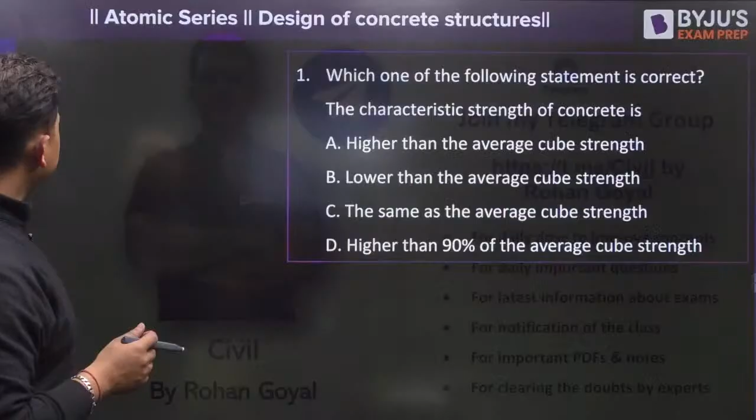Starting with the first question everyone, quickly join everyone. Let us start with today's session, and here is the first question. Which of the following statements is correct?

Vanakkam. Subramanian, vanakkam. So welcome guys.

Welcome, so here is the first question. Tell me what is the answer to this particular question. Very easy question, conceptual. Tell me what is the value of this particular answer. Answer in the comment section everyone, I want each and every one of you to answer. Which one of the following statements is correct? The characteristic strength of concrete is: A) higher than the average cube strength, B) lower than the average cube strength, C) same as the average cube strength, or D) higher than 90% of the average cube strength. Tell me what is the answer.

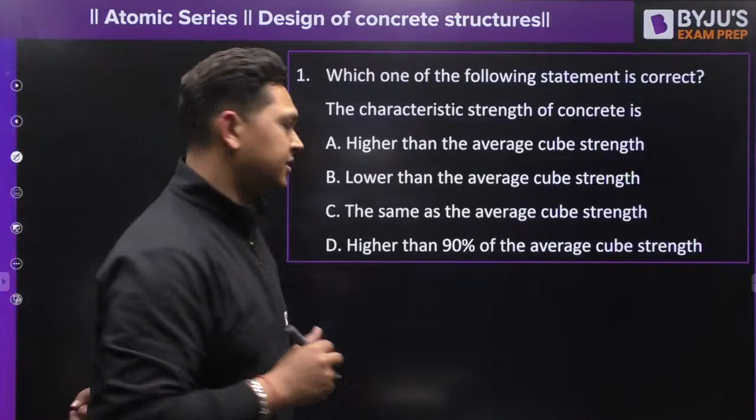Characteristic strength of concrete. Characteristic strength of concrete. Tell me what is the value.

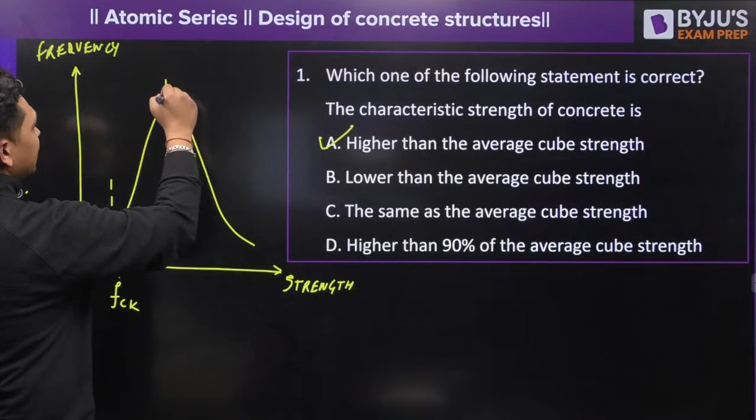Yes, B, very good, lower than the average cube strength. So the characteristic strength of concrete corresponds to a value below which not more than 5% of the test results are expected to fail. So only this area is only 5%. And the average strength is also referred to as the mean strength. So from here it is clear that FCK is less than that of the mean strength.

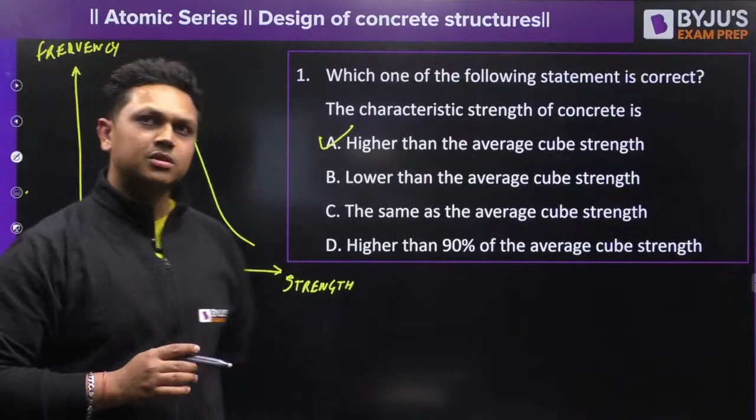So the answer to this - sorry, I have clicked the wrong option, I am sorry, I have ticked the wrong option. So it is clear that it is lower than the average cube strength. Characteristic strength of concrete is lower than the average cube strength. If there is any doubt, you can comment in the chat section at any time, I will refer to your doubt.

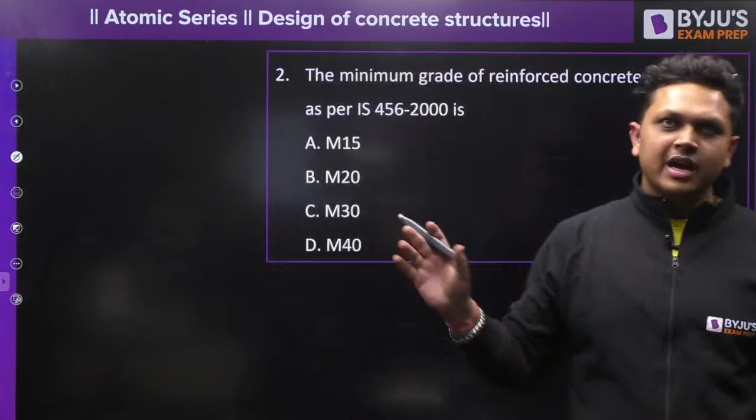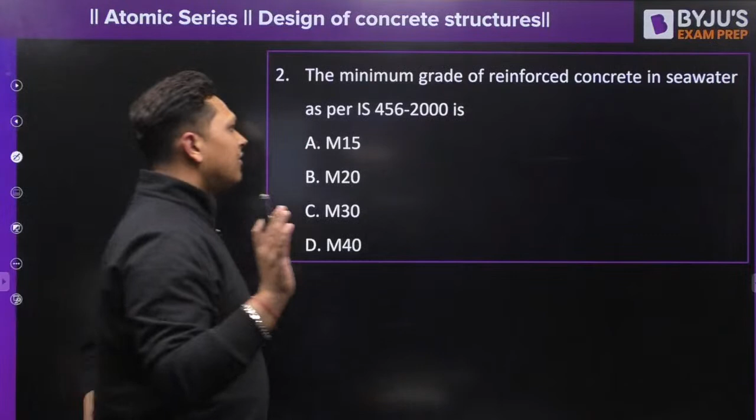Okay, moving on to the next question. The minimum grade of reinforced concrete in seawater as per IS 456-2000. Each and every one of you must be able to answer this question. Tell me what is the answer, A, B, C, D. What is the minimum grade of concrete in seawater, for construction in seawater, or you may also find it in a coastal environment.

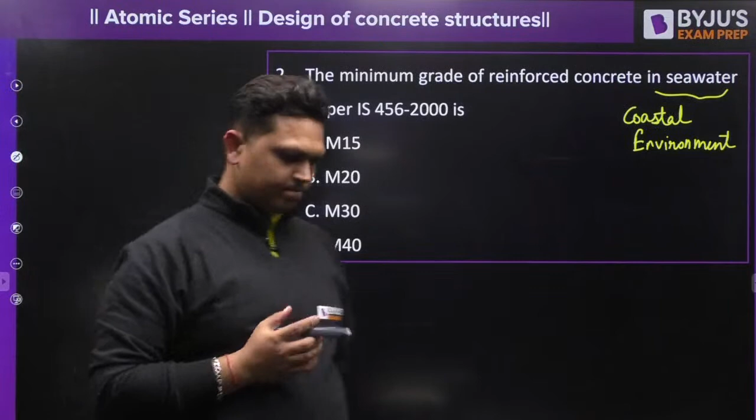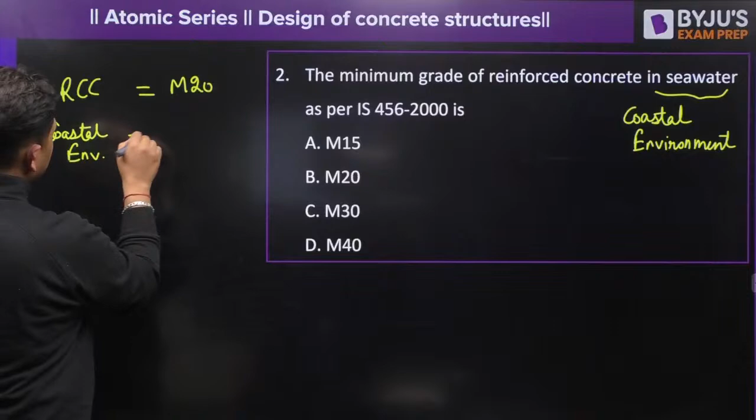In a coastal environment, you may also find it like this. Tell me the answer. For minimum grade of concrete for RCC, normal RCC, mild and severe conditions: the minimum grade of concrete is M20, and if it is in a coastal environment, it is M30.

The answer is M30, very good Suraj. I am finding that there is only one student interested in the BARC and HAL examination. What about others?

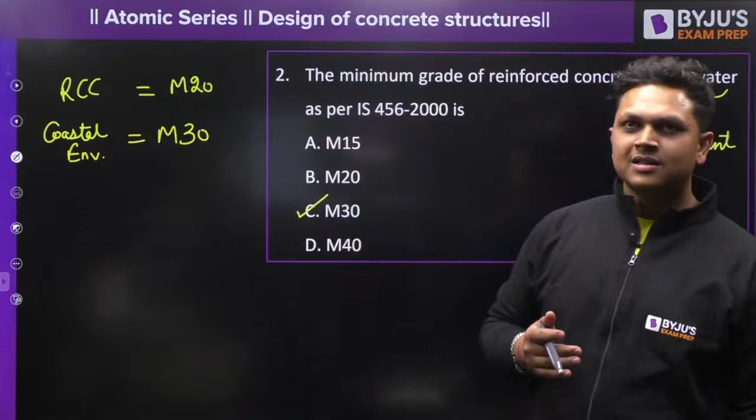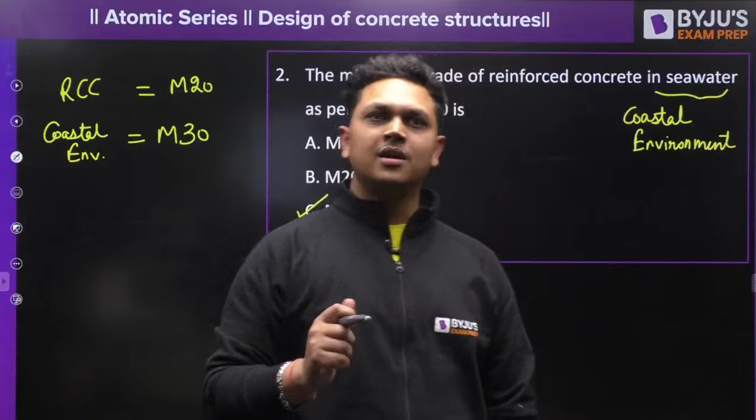Have you lost the hope? Have you guys lost the hope? Tell me, what happened? Jagadishan has also answered me, very good. What about everyone else? Have you lost the hope of clearing the BARC and HAL examination? No, right? You still have the hope. You can still do it, you just have to keep consistent, keep working hard until you reach your goal.

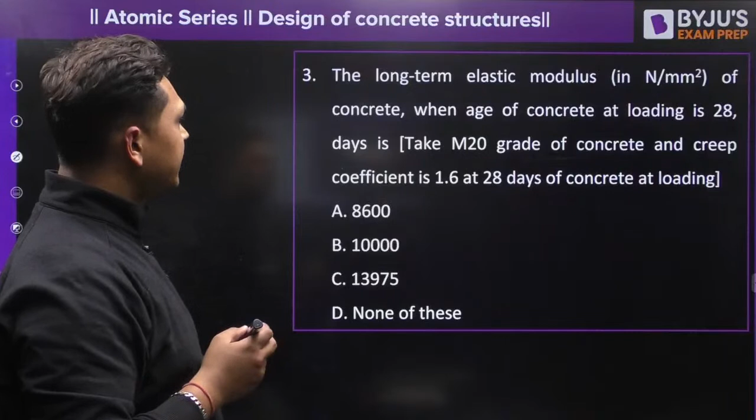Moving on: what is the long-term modulus of elasticity of concrete when the age of concrete at loading is 28 days? You are also given that the creep coefficient is 1.6.

Yes, M30 corresponds to the severe category. Very good, Sumit. Excellent. Severe category corresponds to when the concrete starts to get exposed to the coastal environment.

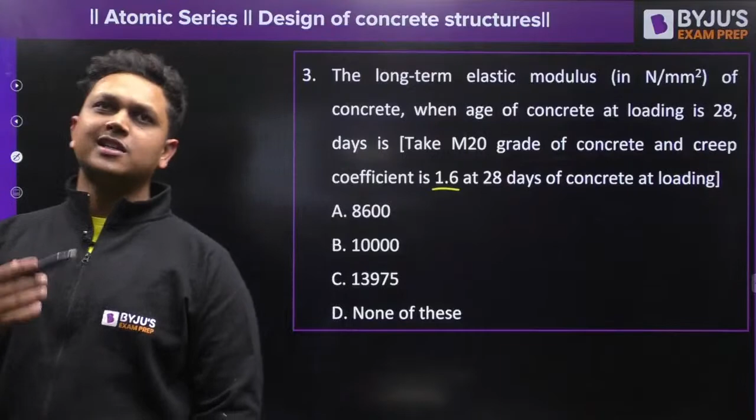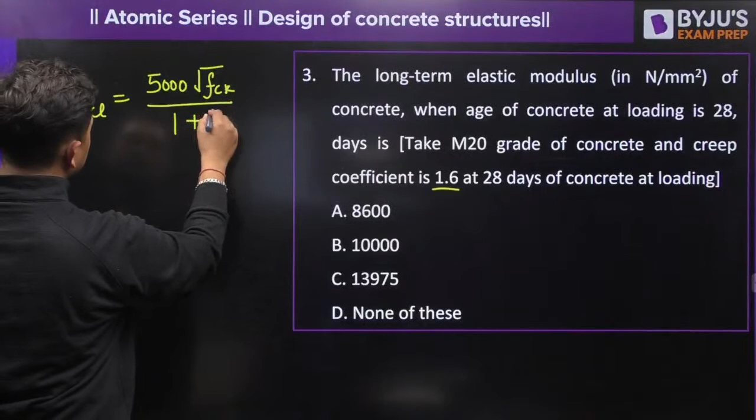What is the answer? Long-term modulus of elasticity. The creep coefficient is already given to you as 1.6. Substitute all the values.

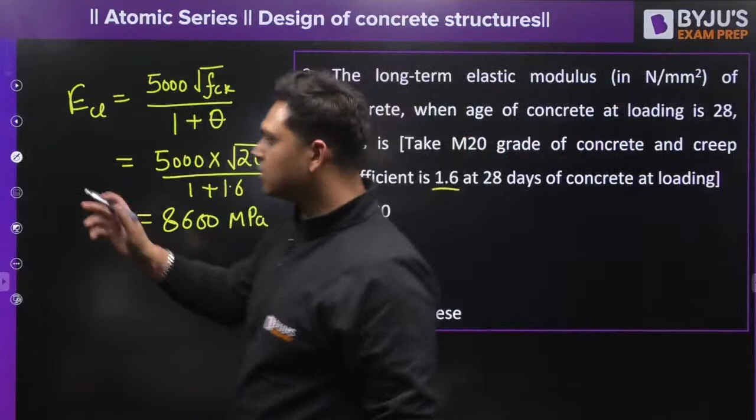If you simplify this and solve it, you will get the answer as option A, right? So the answer is 1800, 8600 megapascal. Each and every one of you getting the same answer? Very good, Sumit, very good Jagadish, Suraj.

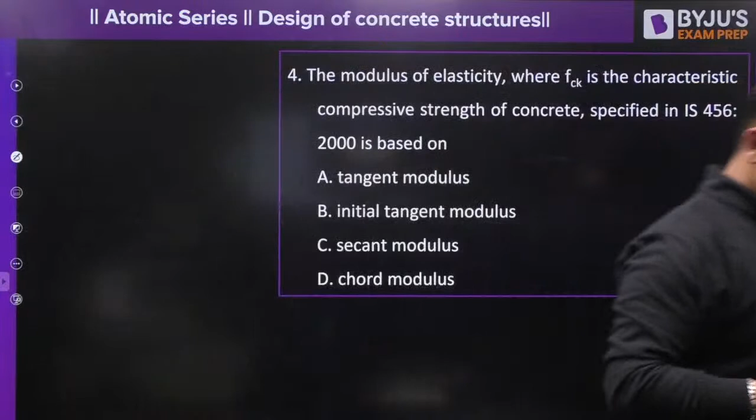Moving on to the next question. Read the question and tell me the answer. This is a tricky question, and a lot of students tend to give me the wrong answer to it. I have explained the answer again and again, and still students make the mistake.

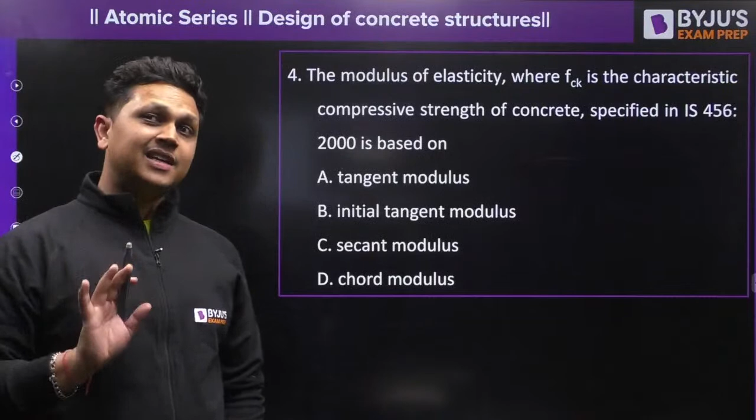Meanwhile you can give me the answer, I will draw the diagram. So this is the stress strain curve.

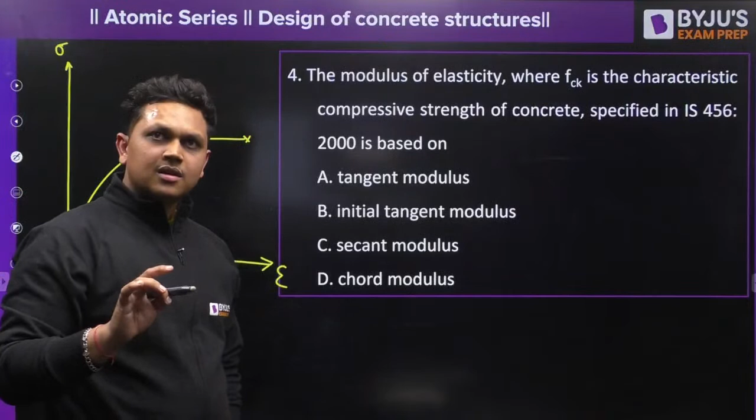What is the answer? This is not the answer, right? Tangent modulus is not the answer. Secant modulus is the answer. Very good, Sumit, very good.

So when we define the modulus of elasticity of concrete, it is defined at a stress level of sigma CBC, which is almost equal to FCK by 3. At this particular stress level, the slope is determined, and this slope is your modulus of elasticity of concrete, which equals 5000 under root FCK.

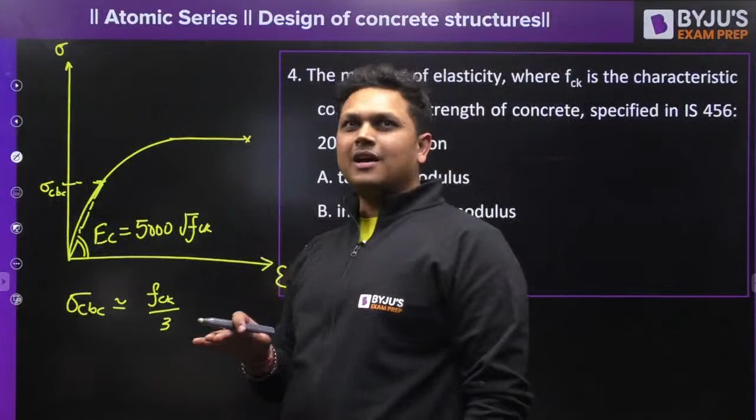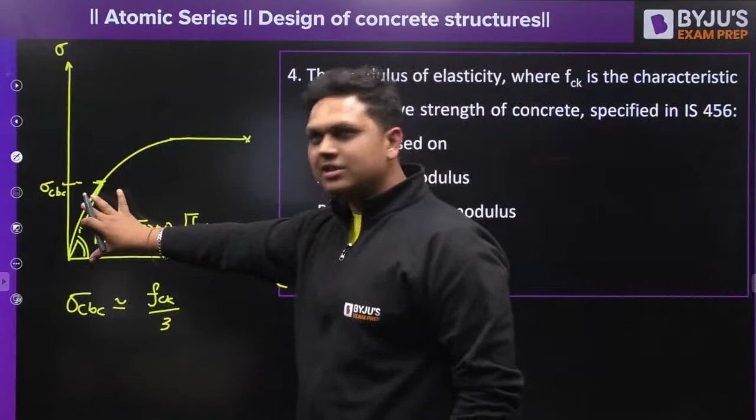So at this particular stress level, the secant modulus is calculated. Coincidentally, in the actual curve, the value is similar to the tangent modulus. There is no difference between tangent and secant modulus in value, but as per the concept of how it is obtained, it is the secant modulus. Do you understand the difference?

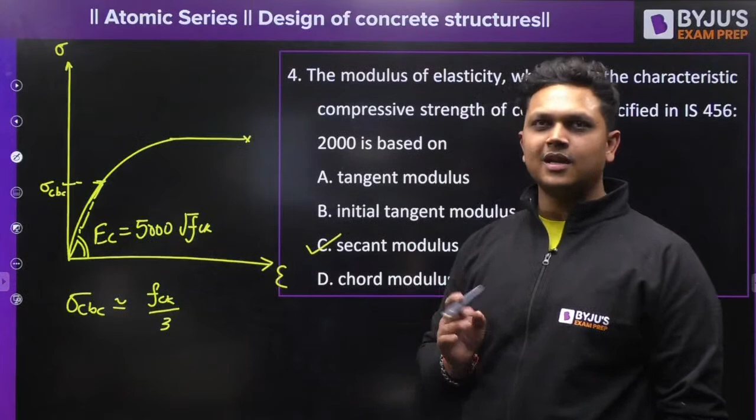Yes or no? Comment in the chat section and let me know, everyone. Do you understand the difference? A lot of students will give me the answer as tangent modulus, but no, tangent modulus is not the answer. Secant modulus is the answer.

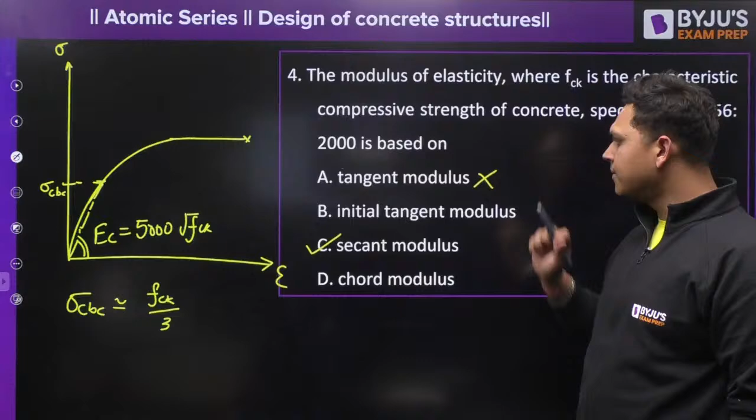All right, next question. Stress strain curve of concrete - I have already given you hints toward the answer, so quickly tell me. Now I want answers from each and every one of you. You already know the stress strain curve, now tell me the answer.

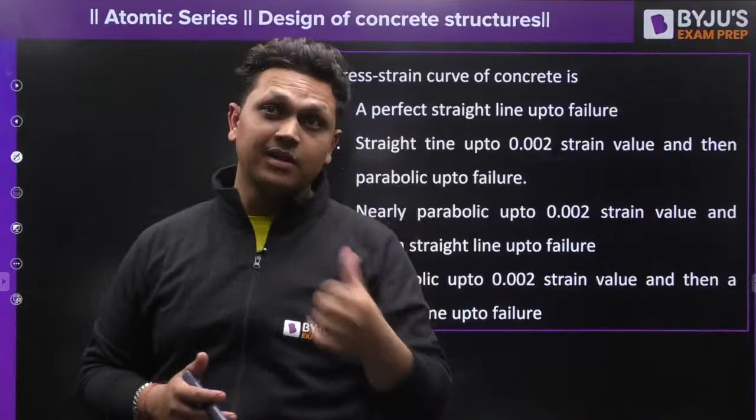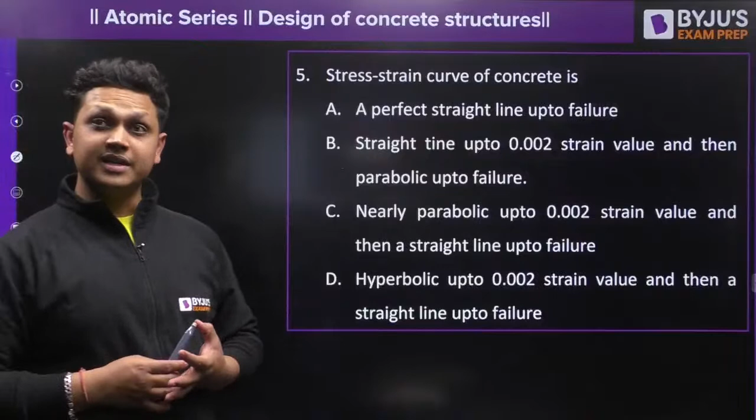So the stress strain curve of concrete is... yes, answer guys, what is the answer? No Suraj, you are wrong. What happened, guys? This is surprising that I am getting a wrong answer to this question. Yes Babu, exactly, you are right. Suraj, now you have given me the right answer. Jagdish, you are still giving me the wrong answer. Sunil and Jagadish, right? Guys, I have already drawn the stress strain curve.

So the stress strain curve of concrete is nearly parabolic.

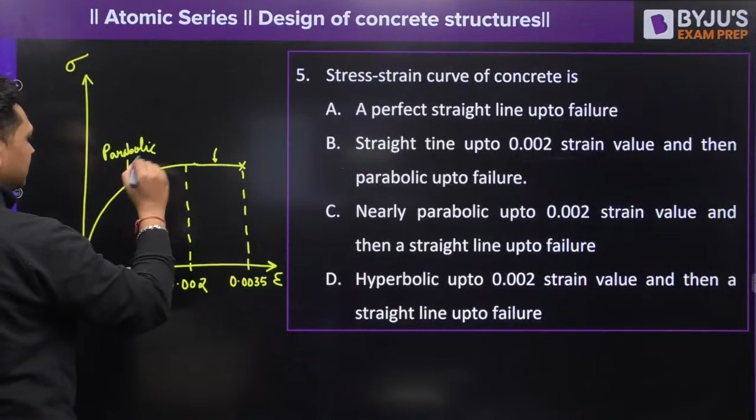Up to a strain value of 0.002 and it fails at a strain value of 0.0035. So it is parabolic up to a strain value of 0.002 and a straight line at a strain up to the failure value. So the answer is C. C is the right answer. Is it clear to all?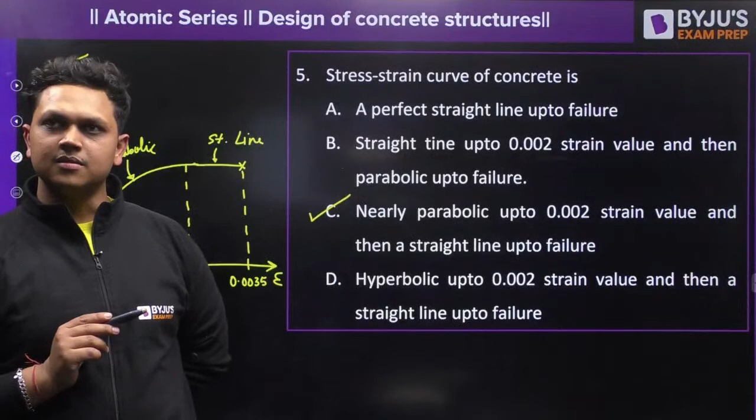Next question. The stresses in concrete in a reinforced concrete element under sustained load due to creep - what happens to the stresses due to creep? Whether they increase with time, decrease with time, remain unchanged, or fluctuate. Tell me, what happens?

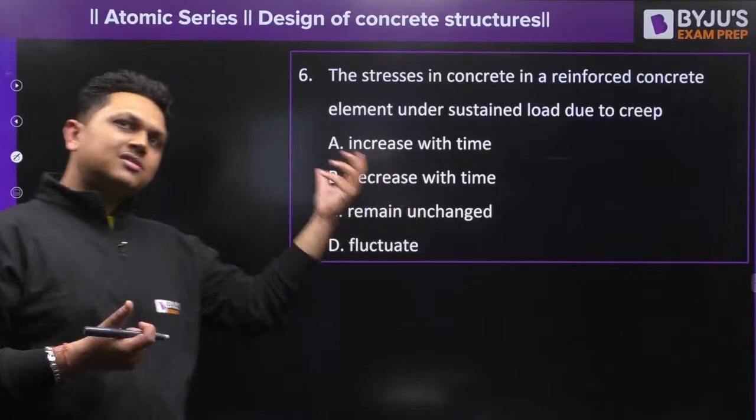So due to creep, plastic readjustment of elements takes place. The molecules of concrete will undergo plastic readjustment, due to which the stresses which were induced in the material due to the applied load will get reduced, because the stresses get converted into plastic strain, which is also referred to as creep. So the stresses reduce with time.

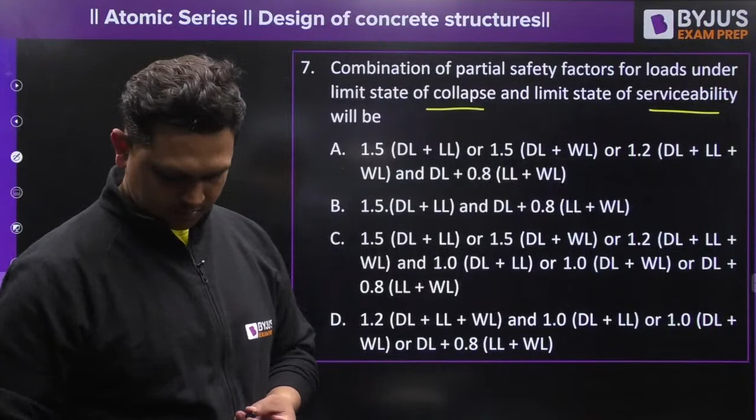Next question. Combination of partial safety factor of loads under the limit state of collapse and limit state of serviceability are given. You have to tell me which of the following is correct. Look carefully, tell me the answer. You take 2 minutes, tell me the answer.

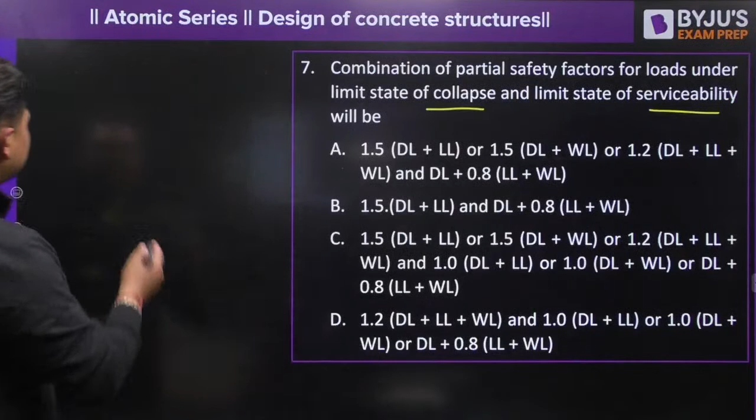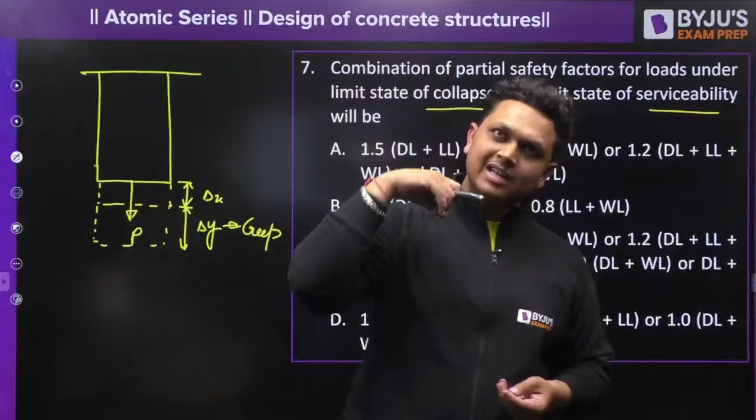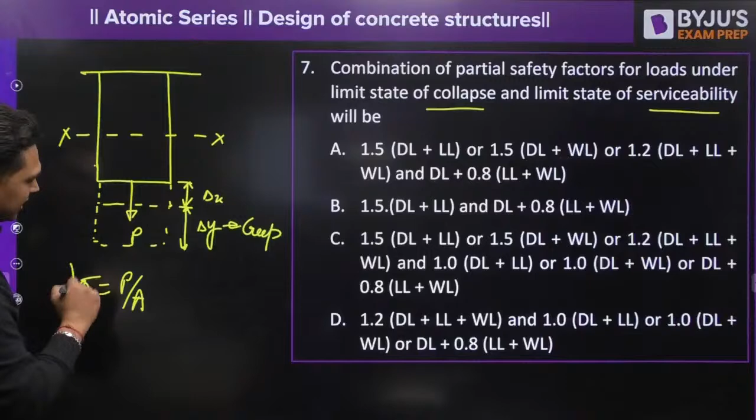When the load is applied, it will slowly undergo deformation - delta x, this is elastic deformation, then it will undergo some plastic deformation, delta y, which we refer to as creep. The reduction is little, but there is some stress reduction. If you take any cross section xx, the stress at this cross section will be equal to P by A. Stress will not change - there is a minute reduction due to creep, but predominantly it is P by A only.

So let us see what is the answer. A lot of students have given me C as the answer and some of you have given A. Let us see. For limit state of collapse: 1.5 dead load plus live load, that's right. 1.5 dead load plus wind load, also right. 1.2 dead load plus live load plus wind load, also right. And for limit state of serviceability: dead load plus 0.8 live load plus wind load, that is also true. All the load combinations are right.

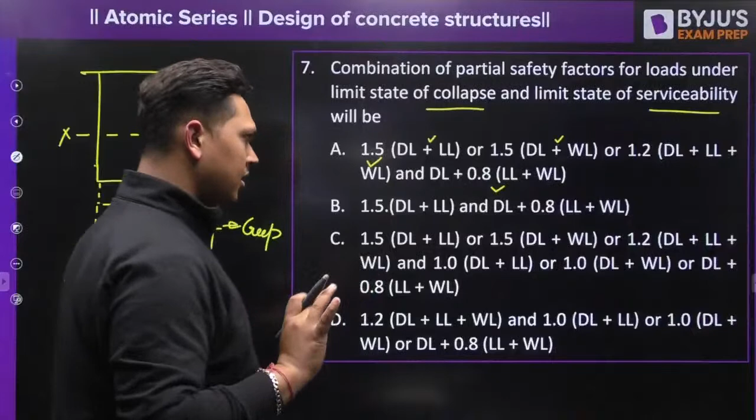Let us see the next option also. 1.5 dead load plus live load plus dead load plus - these two are also there, but this is incomplete. Better option is A. Wait, C option: 1.5 dead load plus live load, 1.5 dead load plus wind load, or 1.2 dead load plus live load plus wind load.

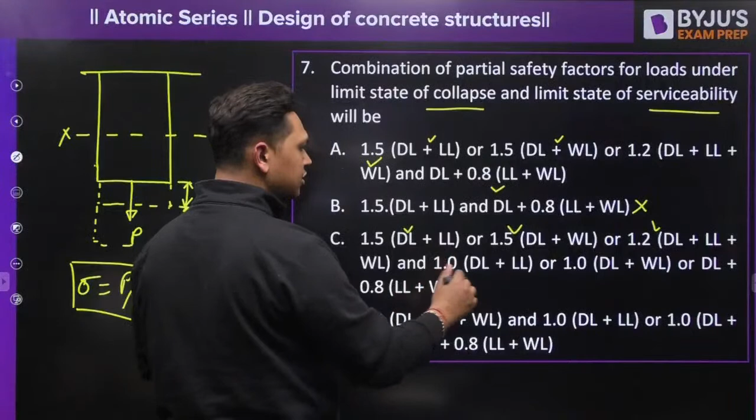So collapse is covered, collapse is complete. 1.0 dead load plus live load, 1.0 dead load plus wind load, 1 dead load plus 0.8 live load plus wind load - so this is complete. Serviceability is also complete. So the answer is C. You will find if you see D, over here the collapse is incomplete - serviceability is complete, but the collapse has only one load combination.

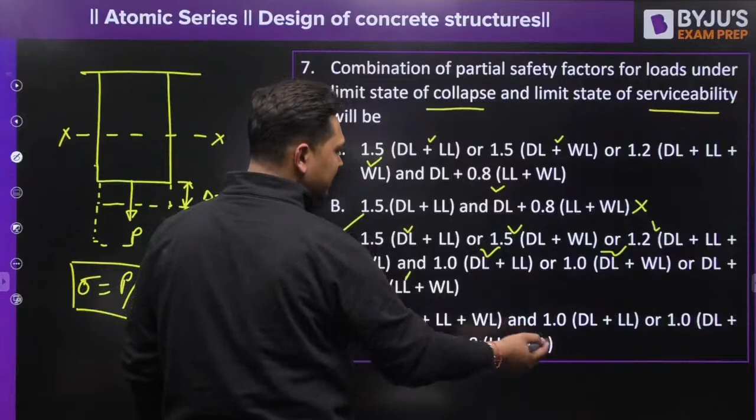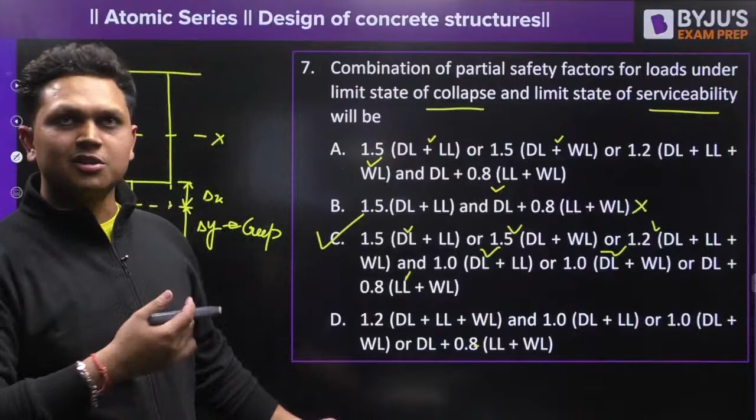The right answer is C. See, all the combinations are there. These correspond to collapse and serviceability only, but other options have missing load combinations. This one has all the load combinations. Now you will ask, sir, earthquake is not there - the question assumes earthquake load is not acting, only wind load is acting.

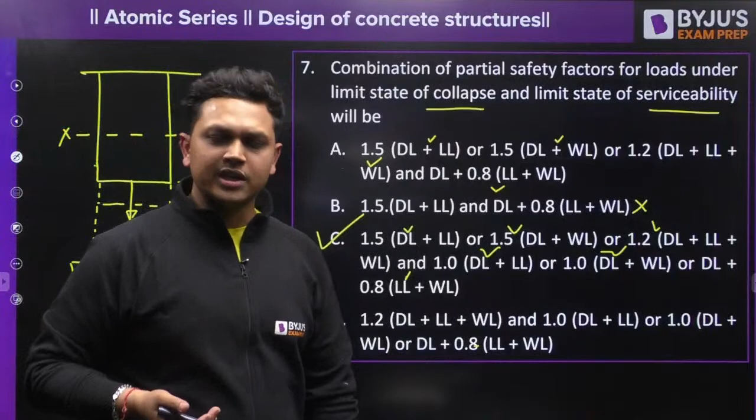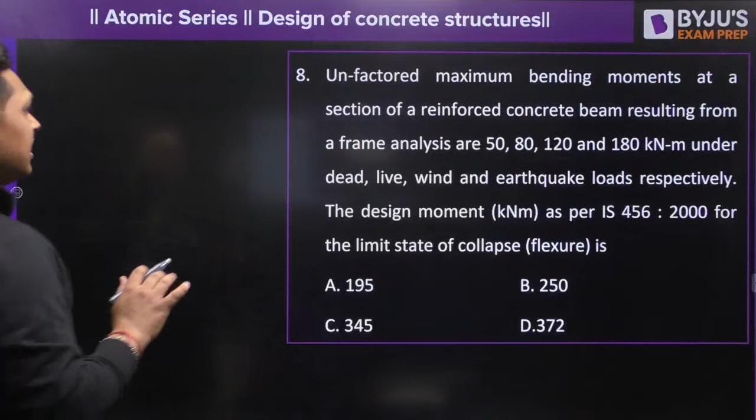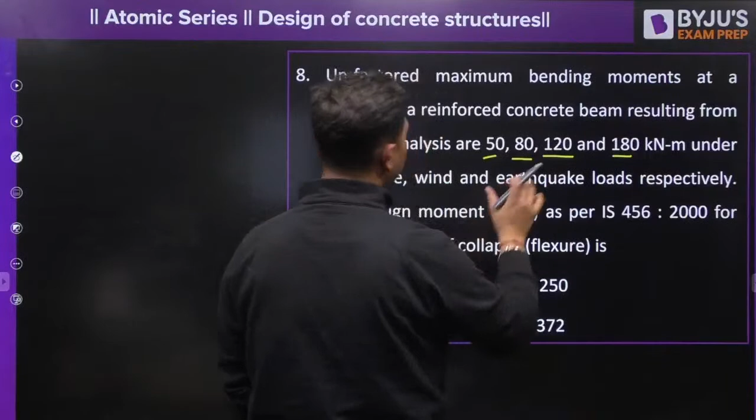Next question. Unfactored maximum bending moment at a section of a reinforced concrete beam from a frame analysis are 50, 80, 120 and 180 under dead, live, wind and earthquake loads respectively. So bending moments are given to you. Let us call this MD, ML, dead load, live load, wind load and earthquake load. What is the design moment as per IS 456-2000, as per the limit state of collapse?

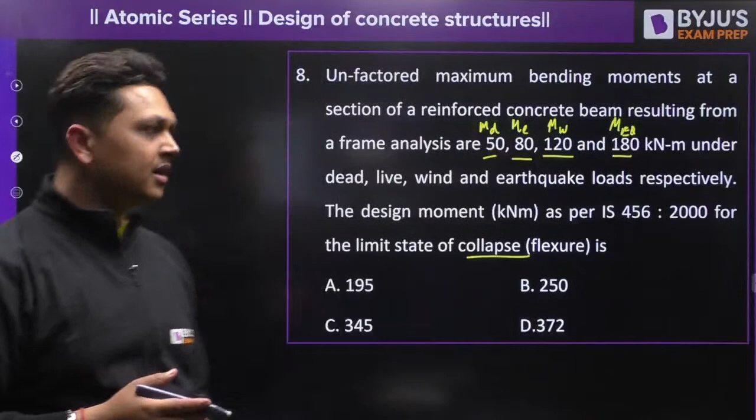First of all, what are the load combinations? You can solve this yourself, take one minute. We have already seen all the load combinations. You just have to apply all of them and find the maximum bending moment achievable - that is your design moment. The design moment is the maximum of all the load combinations. Tell me the answer, everyone.

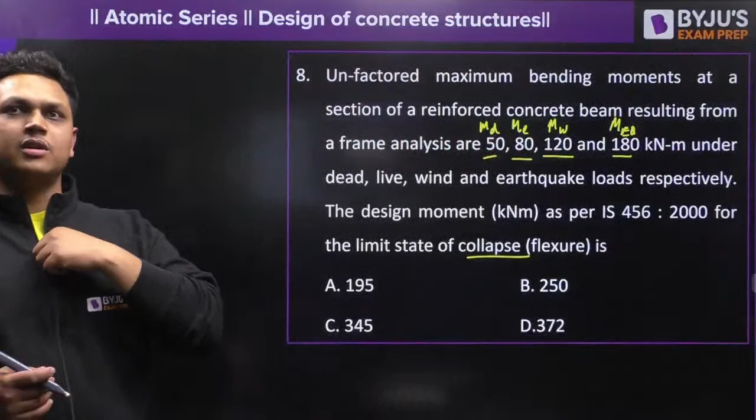So any answers? Okay, I have already got an answer, very good. Let us find the answer. What are the three load combinations? First load combination is 1.5 dead load plus live load. So 1.5 times dead load 50 plus live load 80, this will be 130 plus 65, which is 195. So 195 is one option.

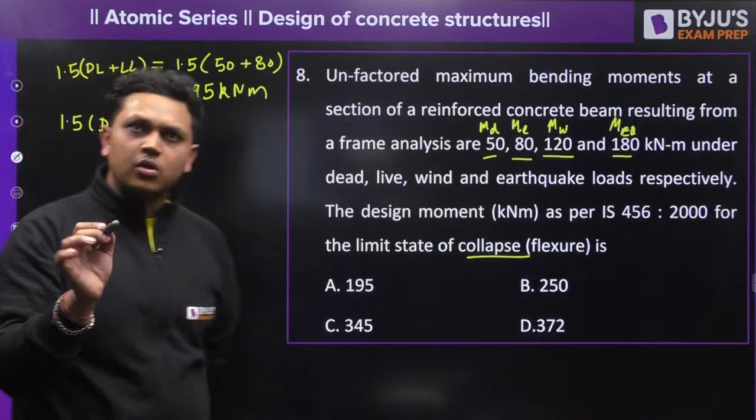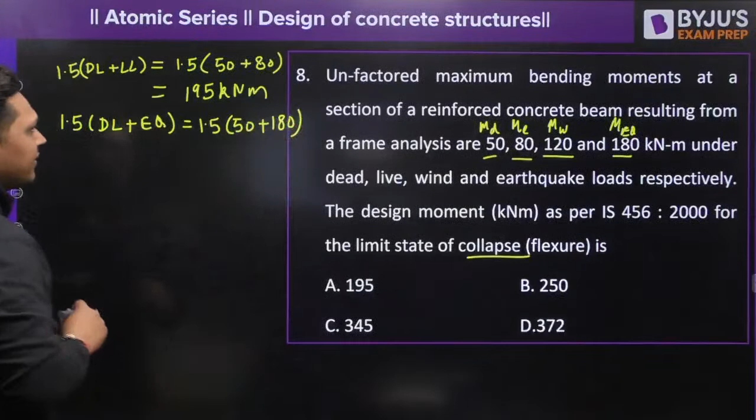Next load combination is 1.5 dead load plus wind load or earthquake load, whichever is maximum. Earthquake load is maximum, so I will consider earthquake load only: 1.5 times dead load plus earthquake load. So 180 plus 50 is 230, and 230 plus 115 is 345 kilonewton meter. So we have one more option.

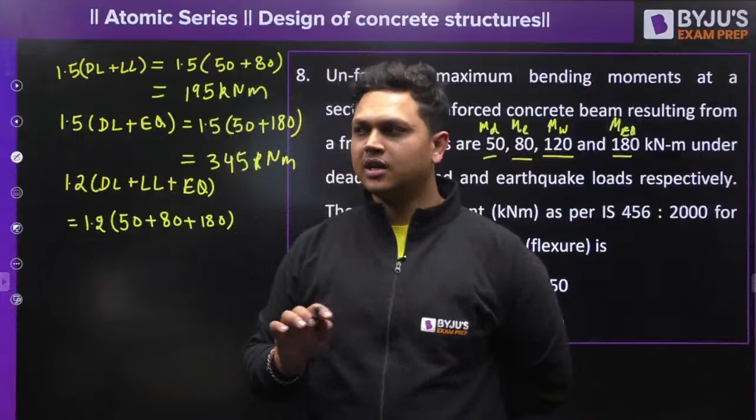Next is 1.2 dead load plus live load plus maximum of wind load and earthquake load, which equals 1.2 times 50 plus 80 plus 180. So 180 plus 50 is 230, 230 plus 80 is 310, and 310 plus 62 is 372 kilonewton meter. So the answer is D, 372 kilonewton meter.

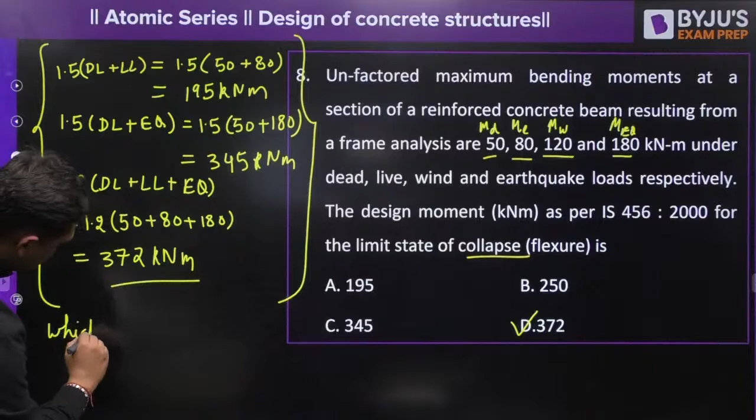Very good. So you have to take the maximum of the three. Whichever is maximum. All right, next question.

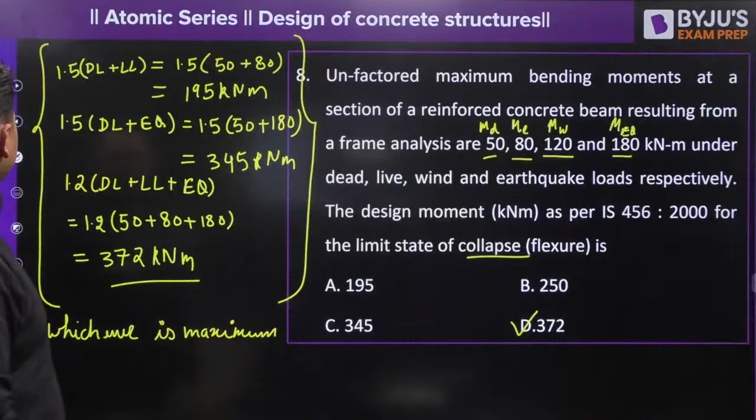At what stress does the first flexural crack appear in an RCC beam made of M25 grade concrete? So tell me, at what stress level does the first flexural crack appear in an RCC beam subjected to bending? Flexural crack means it is subjected to bending.

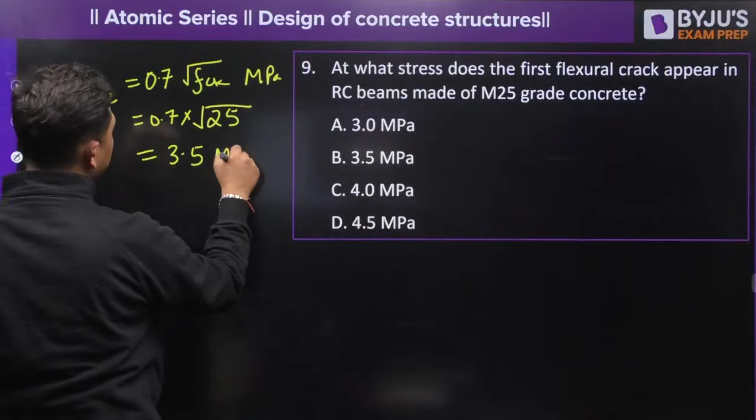At what stress level? Yes, everyone. So the first flexural crack appears at a stress level of, very good, when the stress reaches modulus of rupture FCR, which equals 0.7 under root FCK megapascal, which equals 0.7 under root of 25, that is 3.5 megapascal. So the answer is B.

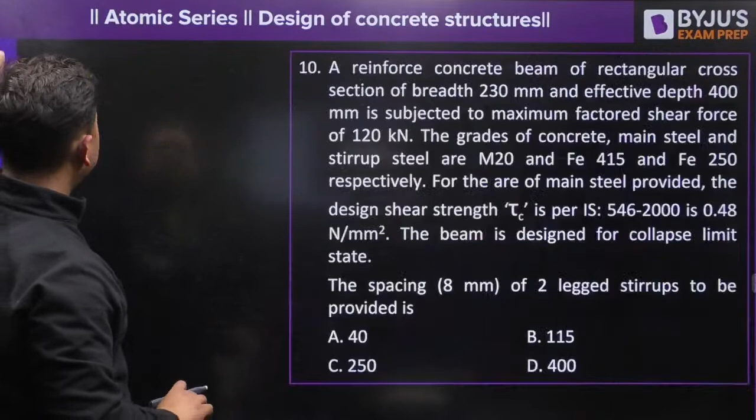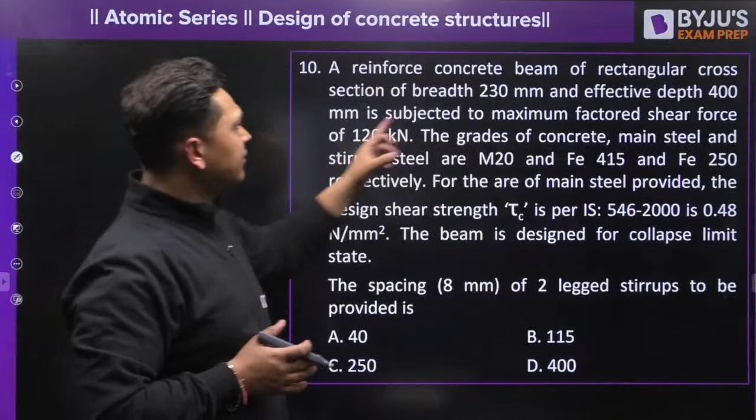Next, last question. A good question, guys, so I want everyone to be attentive. You are given a beam whose width is 230 mm, effective depth is 400 mm, and it is subjected to a maximum factored shear force of 120 kilonewton. The grade of concrete, main steel and stirrups are given: concrete is M20, main steel is Fe415, and stirrup is Fe250.

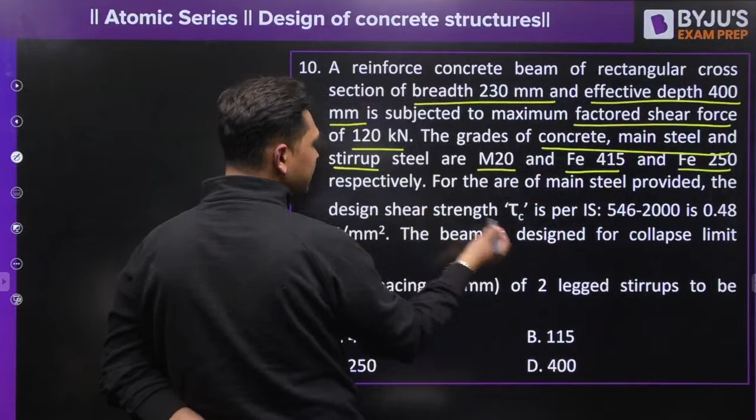For an area of main steel provided, the design shear strength tau C is given to you as, as per IS 456, 0.48 megapascal. The beam is designed for collapse limit state.

The spacing of 8 mm two-legged stirrup to be provided. So what is the spacing it is asked? Let us write down first of all the given data.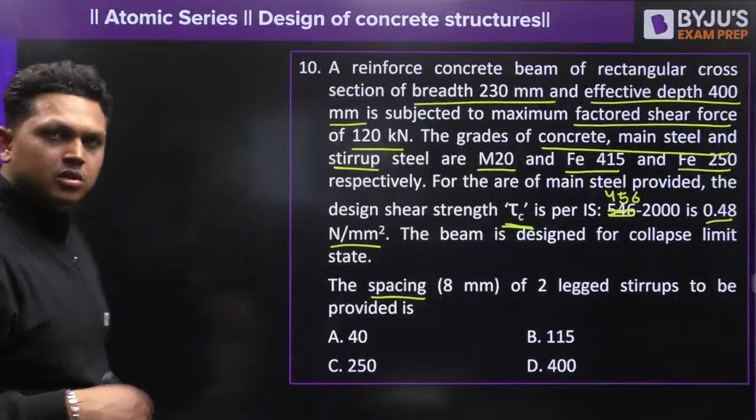B is given to you as 230. Meanwhile you can solve this. I am writing the data, meanwhile you can start solving.

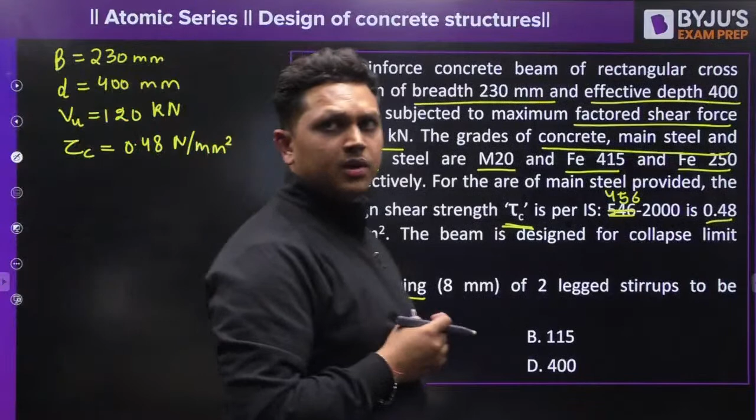So first of all, for what value of the shear force will you design your shear reinforcement? This much amount of the shear stress can be resisted by concrete, by the RCC section without any shear reinforcement. So what is the shear force that can be resisted by the RCC section without any shear reinforcement?

It will be tau C into BD. Now this is in Newton, converted into kilonewton. So if you simplify this, can you tell me what is this value?

So 44.16... Now you have to design your shear reinforcement for a shear force of Vu minus Vc, which is equal to 120 minus 44.16. So this is the value of the shear force that you have to design your shear reinforcement for.

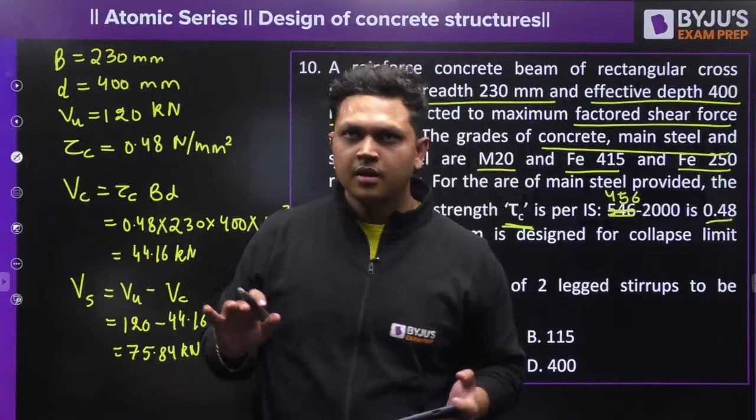That is this value. If there is any doubt, you can ask me at any point. If you have got the answer, you can comment in the chat section. I guess you guys are giving me the answer as B. Let us check what is the right answer. So this is the value of the shear force for which we have to design the spacing of the shear reinforcement. So what is the formula?

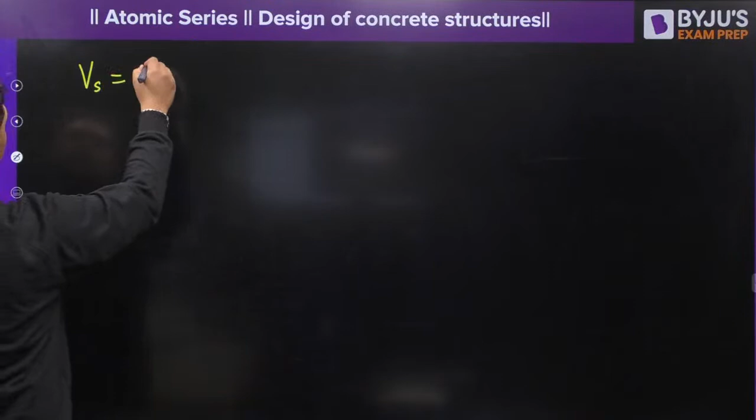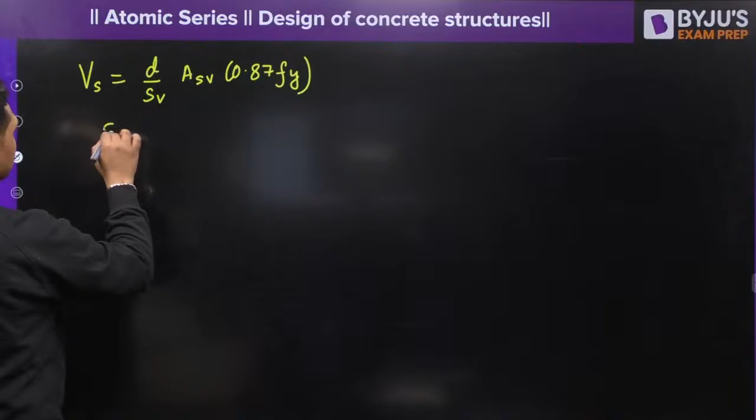Vs is equal to d upon Sv, ASV into 0.87 Fy, that is stress into area, number of stirrups into area into stress. So Sv will be equal to d ASV 0.87 Fy divided by Vs, which is equal to d is 400.

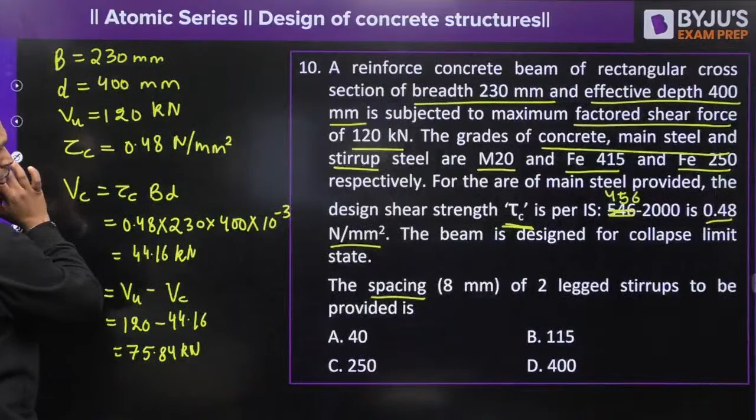ASV is how much? Two-legged, how much? 8 mm dia, two-legged 8 mm dia, right? And the grade of stirrup is Fe 250, so Fy will be 250.

Divided by Vs, that is 75.84 into 10 to the power of 3. So this you will get in mm. So tell me what is the value you are getting, guys.

115.32 mm. So this is the spacing of the stirrup that we are getting. We have now, lastly, we will also check what is the minimum requirement, SV minimum requirement.

So ASV upon B into SV should be greater than equal to 0.4 divided by 0.87 Fy. So you have to check the minimum requirement also. So SV should be less than or equal to 0.87 into 250 into two-legged 8 mm dia, 0.4 into B, that is 230.

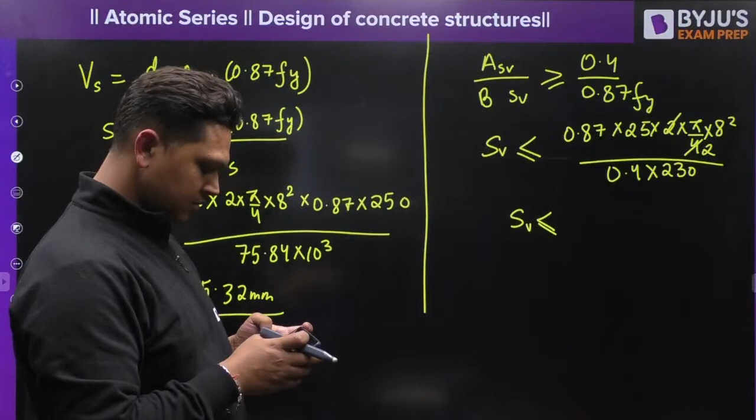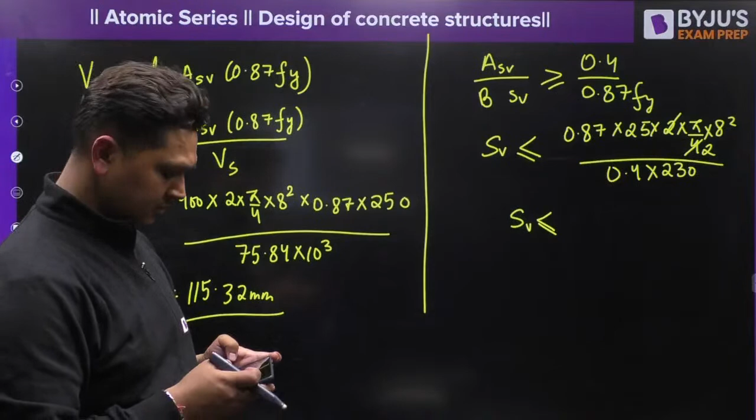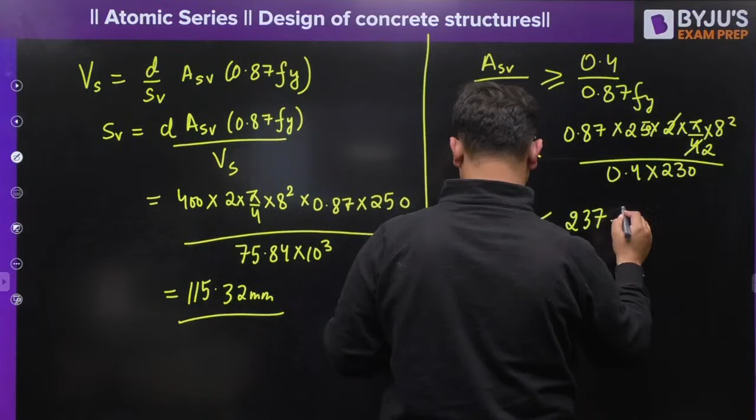How much you are getting? This is 250, right? So 237, I guess you are getting. 237.6 mm. So obviously it is less than this, so it is satisfied.

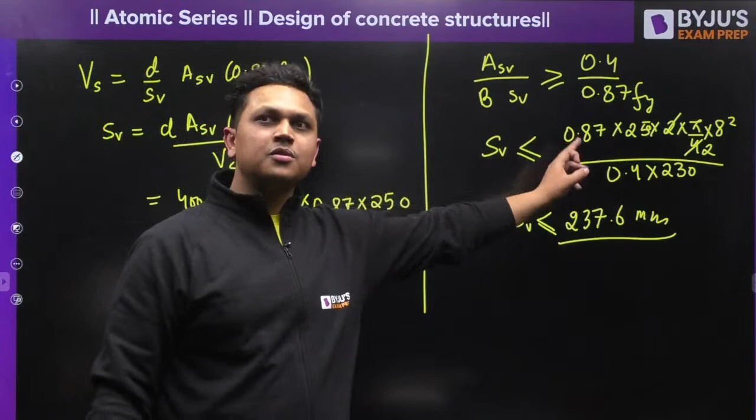The minimum, see, you are not paying attention, Jagadish. I accidentally wrote 225, it was 250, right? So you are not paying attention, you have to see this yourself. Sometimes we may do a mistake on the screen, but you guys are students, you should not do the mistakes. Alright, so the answer to this given question will be 115.